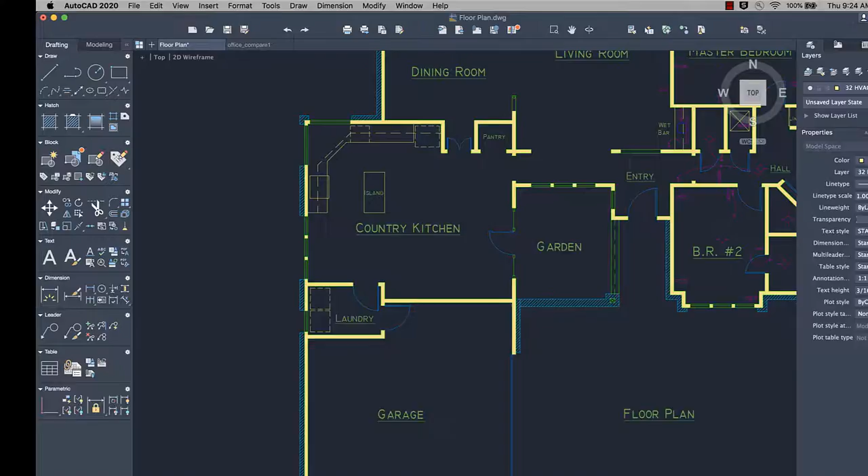Let's take a look at some of the new features in this release.

We updated the user interface background color to improve the clarity and crispness of the dark theme.

We improved the way you insert blocks using the Content palette, which has also been renamed to the Blocks palette. Icons have been added where you can switch between inserting blocks from the current drawing, recently inserted or created blocks, favorites, or a selected block library.

The Recent view displays the most recently inserted or created block, regardless of the current drawing. These persist between drawings and sessions.

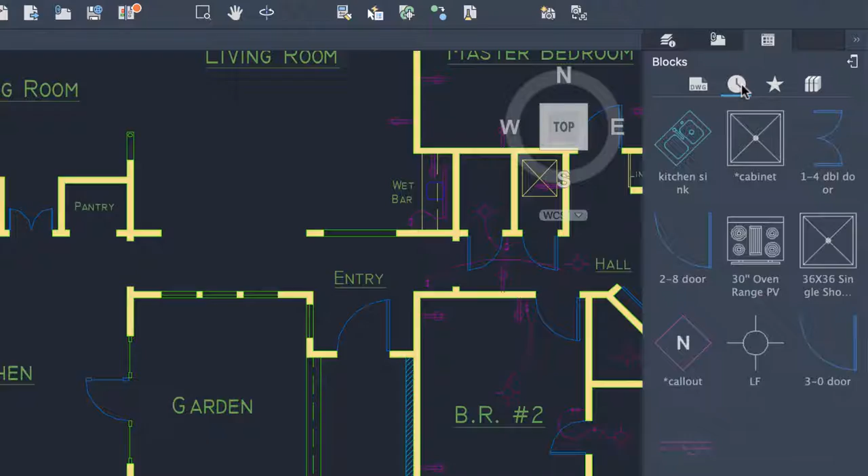Select how much information you want to see on the palette by choosing from the various list types or different icon display sizes.

It's easy to search for the exact block you're looking for. Search results can include blocks from the current drawing, recently used, favorites, and the active block library.

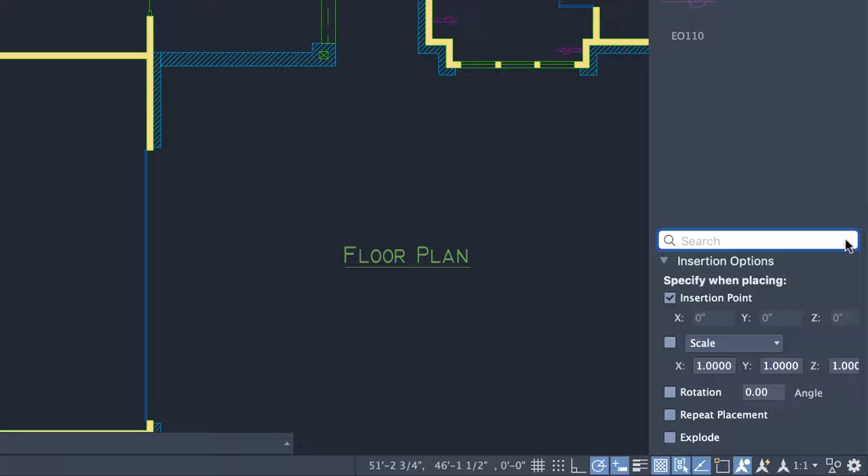Before inserting a block from any view, set insertion options like insertion point, scale, rotation, repeat placement, and more. When repeat placement is checked, press Escape to exit the command.

Place blocks from the palette by dragging and dropping, or by double-clicking on the block and placing it into the drawing for more precision. You can also browse to a drawing file for insertion.

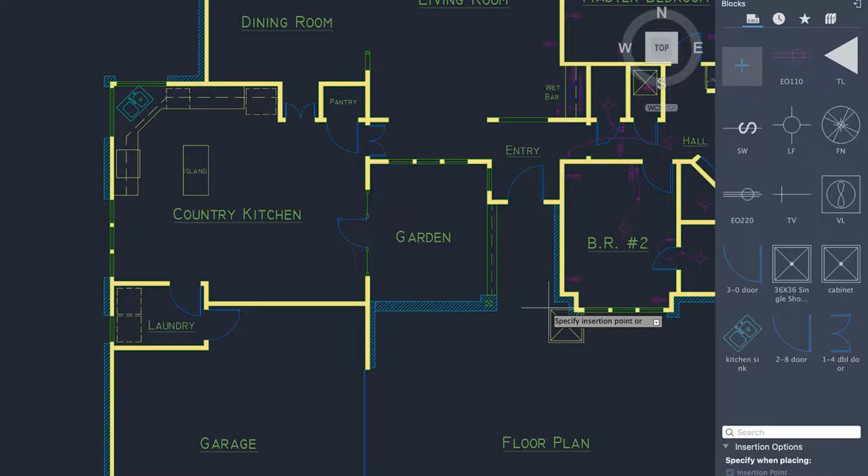The DWG Compare feature, introduced last release, has been improved based on your feedback, so that you can compare and make changes in real time. Now when you select the drawing you want to compare to the current drawing, the differences are displayed right in the current drawing.

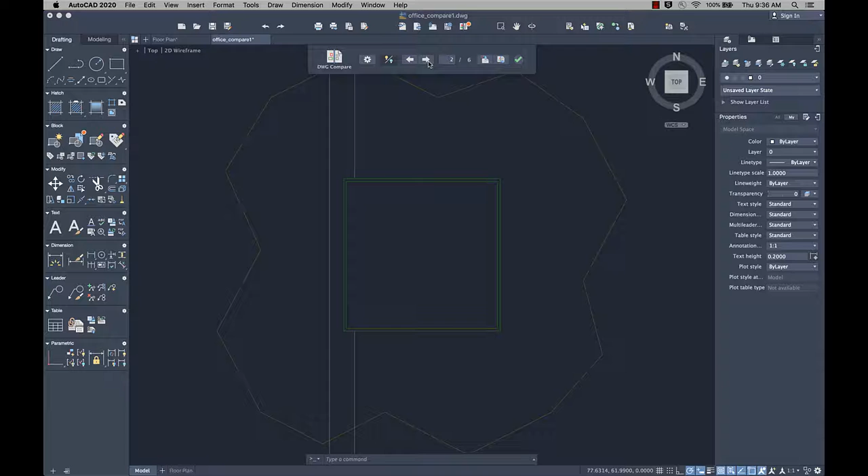Select the objects from the compared drawing and import them into the current drawing in real time. Any objects you import will automatically turn gray, indicating objects now exist in both drawings.

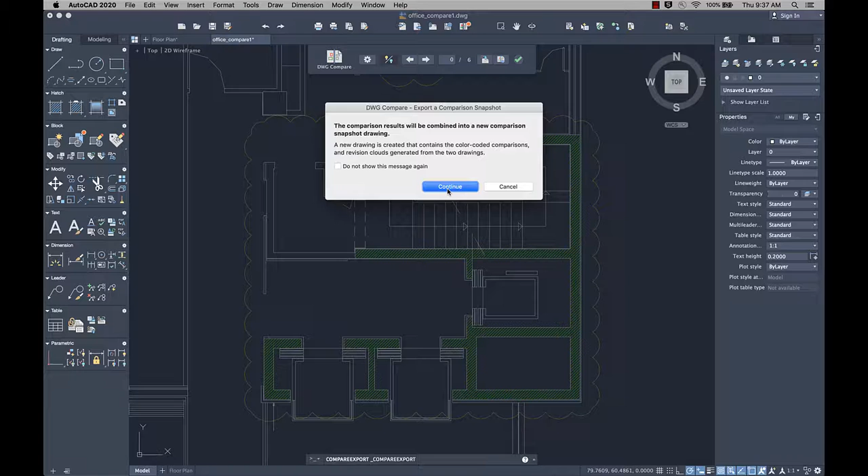You can also export both drawings to a new snapshot drawing that combines the differences between both drawings. The snapshot drawing is the same as a drawing compare in the previous release. When you select Exit Compare, the differences are no longer displayed.

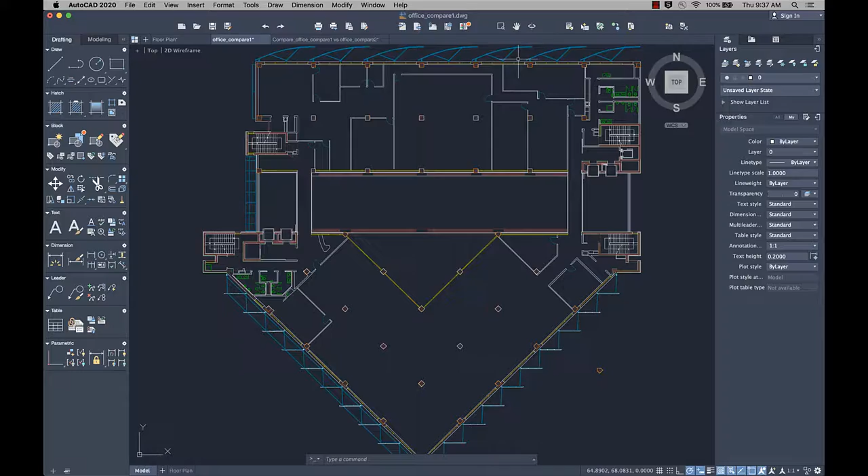Measuring distances in your drawing has become much faster with the new quick option of the Measure Geom command. You can add the Measure Geom command with the quick option to the toolbar.

When this option is active, the command displays dimensions, distances, and angles within a 2D drawing dynamically as you move your mouse over and between objects. The distance between two objects is measured only if the objects are parallel.

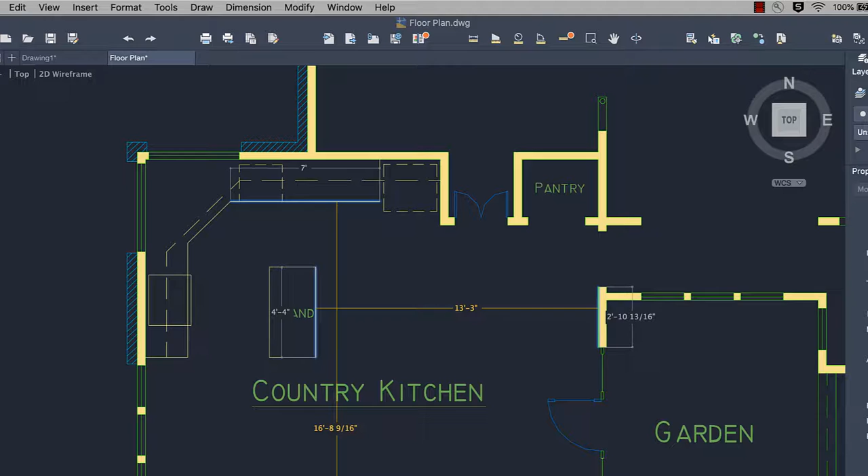The small orange square in the corner indicates the lines are at a 90-degree angle.

Rollover tooltips have been added. These tooltips display current values of certain properties when the cursor hovers over an object in the drawing area.

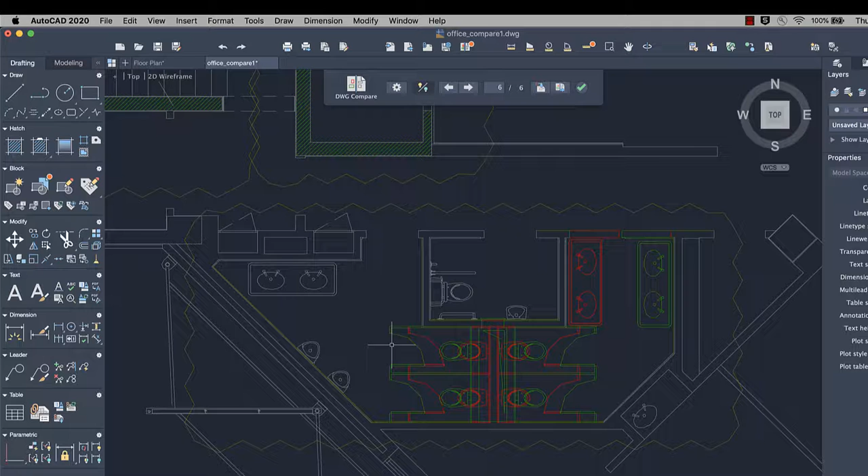During a drawing compare, the Rollover tooltip includes additional information related to the comparison. You can control the display of Rollover tooltips in the application preferences.

Support for Korean has been added. You can change the language in the application preferences dialog. Restart AutoCAD for Mac to see the language change.